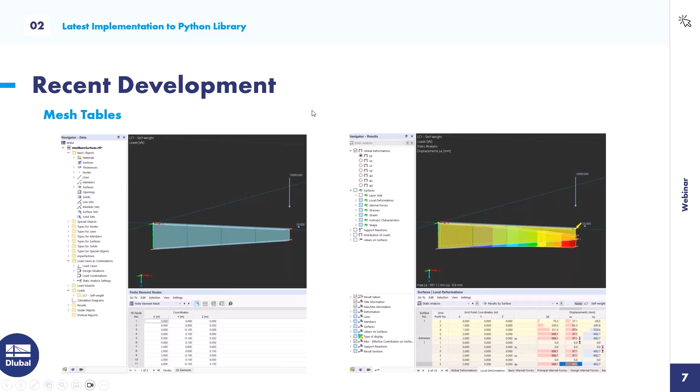And lastly, the most exciting one in my eyes - we have developed our chatbot assistant using large language models. We trained a large language model on data we've been building for years. Now you can ask anything related to Dlubal software, finite element analysis, or any question you can imagine about structural analysis, and Mia is going to help you with that.

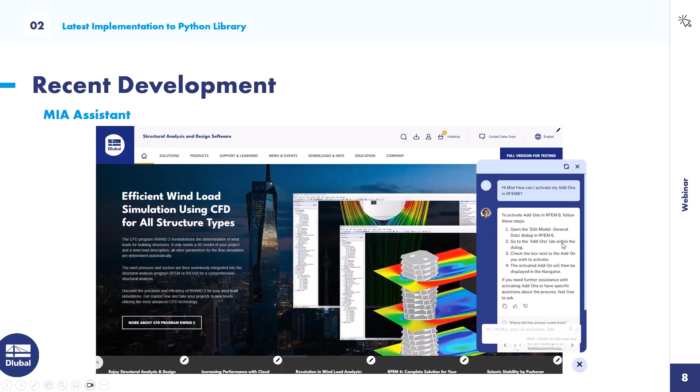Mia is directly integrated into our website. You can access Mia through our website, or it's directly integrated in RFEM itself too. So there are two points where you can access Mia.

Okay, after the latest developments, now I'll show you our library and community-driven developments. As Dlubal Software, as I said, we're committed to keeping our ongoing development open source and collaborating with our users. Our whole API development is public on GitHub, and is accessible to everyone.

On our GitHub page, we are getting in touch with our users, supporting them with their questions, and they're also supporting us with their contributions. I would like to invite everyone in this webinar to our repository on GitHub and be a part of our community.

Also, we have a documentation website for our external developers. On this website, we have articles about how to get started, how to install the library, and all the necessary insights. We also have explanations for every class and method. I kindly ask you to visit it and take a look - you can find the link in our GitHub repo.

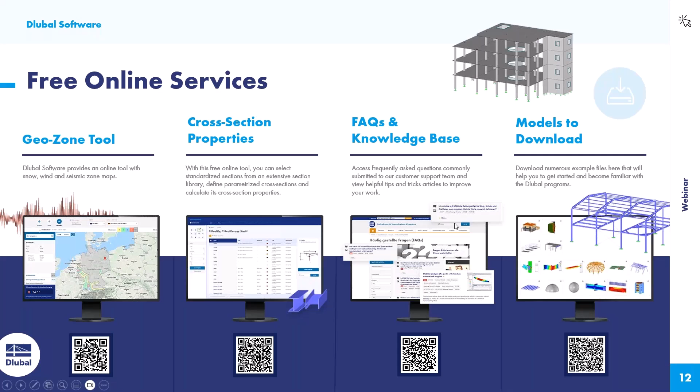So that's it with the presentation. Let's quickly jump into the real-world applications I wanted to show you. In this webinar, I'm going to use Visual Studio Code. I'm going to open my webinar examples.

So as you can see, I downloaded my library here. This is the RFEM library I would like to access, and you can also access it via pip install, but I wanted to use it from a local directory for this webinar. If you want, you can use it via pip too, so it's accessible from everywhere.

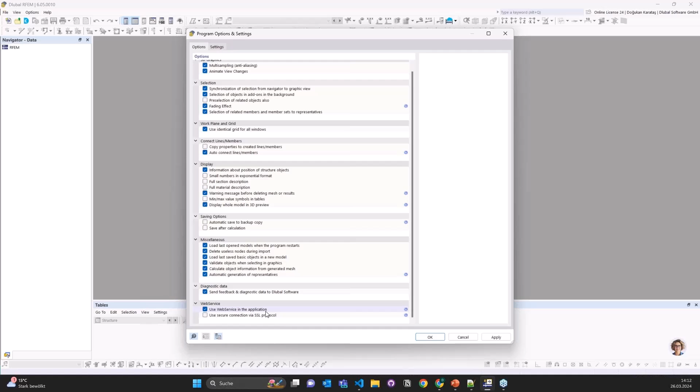First example, I'm going to show you a dynamic analysis of a two-story concrete building. I'm going to create a Python file here. I opened my RFEM already, and in the program options, use web service in application is enabled and server port range is true.

First thing I need to do is import my necessary libraries. I'm not going to write them from scratch, I prepared it beforehand, so I'm just copying and pasting. First I'm importing the enumeration items, all of them. Then I'm importing the model class, calculate all, set add-on statuses, and so on, plus all the basic objects I need: material, section, thickness, outline, etc. Also some static analysis settings, load case and model analysis settings, and some loads, surface load. Then to access the results, I'm using our result tables class.

First thing I would like to do is call my model class, and I'm going to give an argument true, which means create a new model. If you want to access an existing model, you should call it false. Then I'm going to give the name of the model I like, so dynamic analysis. Then I'm going to put just a classical Python checker for whether I'm running directly inside the script or importing something, so it should be main.

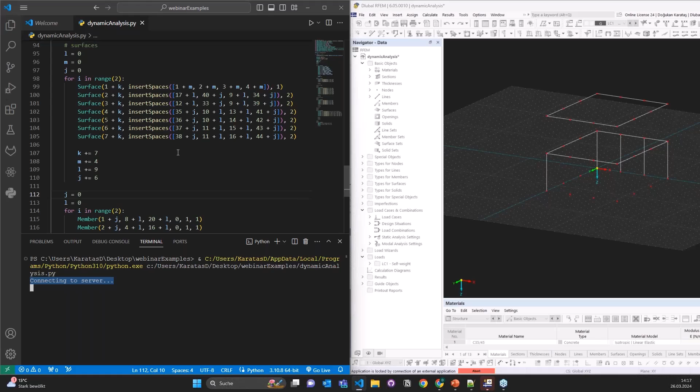As you can see, now my dynamic analysis model has been created. New model is open, and then, yes, application is locked by connection of an external application. This external application is my Python program, apparently. So as you can see, now the lines has been created, materials, and then surfaces and members. Done, so my geometry is right here.

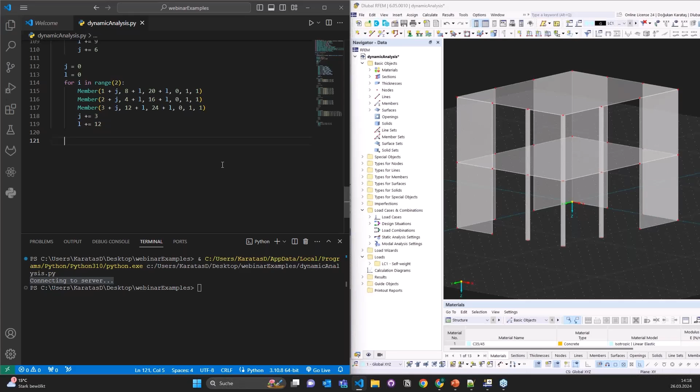Nice, yeah, after the geometry, now I think I can jump into what I need. So first I need the boundary conditions. So I would like to assign some line supports and node supports. So I'm going to call my line support class, and it says to me number of the line support. So it's the first one, and then I can assign the lines.

So let me check which lines I need. So 37, 34, 33, 36. So it's from 33 until the 38, sorry, 35, 36.

Yes, and then I can select my support type. So I'm going to use hinged. As you can see, I already defined - when we are creating this library, we defined some default values. As you can see here, the default value is hinged. So if I just leave it empty, it will know I want to use hinged, so I don't need to create something else for it.

Now I go to nodal support. It's nodal support 1, and which nodes I would like to assign here, 8. What's the member now? 4 and 12 here. So 4, 8, 12. And then it's the same, but just for showing, you can just call nodal support type, and that, as you can see, there's fixed, free, hinged, roller, and so on. So I'm going to select hinged here.

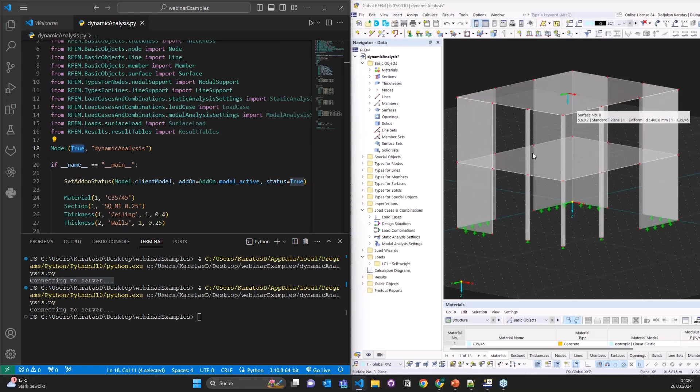Maybe there could be a question from this part, because in the model, where is it? Yes, in the model class. So I told the program through dynamic analysis, create me a new program. But we added a new feature that if you're calling an existing application, no matter what, if you write here true or false, it will automatically know which model to connect. So it's not going to be closed and written again, so you don't have to wait again and again every time you run your program.

Okay, after the nodal supports, I would like to create some analysis settings for static analysis settings. As you can see, there are lots of attributes for static analysis settings, but I'm just going to use the default ones. Also for modal analysis settings, I'm going to use default modal analysis settings.

After that, I would like to create 2 load cases. The first one is that I'm going to assign some dead loads. Also, I'm going to think about the self-weight too. So for this, as you can see, there is an attribute of self-weight, so there's a list. I'm going to open my list and tell true, yes.

Consider the self-weight - not on X direction, 0, not on Y direction, 0, but in Z, so 1, yes. So that means take into consideration the self-weight in the Z direction.

So lastly, I need to assign an action category type, which is permanent, G, for this case, yes. As you can see, for all the enumeration items, we already assigned all the enumeration items to a class, so you don't need to write it from scratch. When you use dot notation, you can see all types of action categories inside the library, and you don't need to write it from scratch. I know it's named something like permanent and G, and I can just write some letters and it's here.

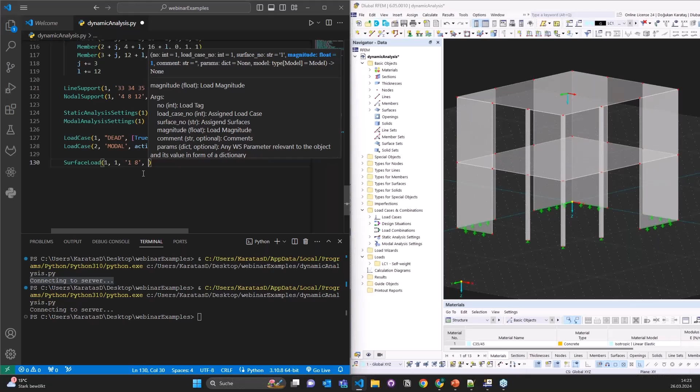Yes, it should work, I hope. After that, since I have load cases, I can create a surface load. So surface load 1, I'm going to inherit it from load case 1, and assign it to the surfaces for ceilings, surface number 1 and 8.

Let's select 5 kilonewton per square meter. Then I'm going to calculate all, but before that, let me check if the loads and analysis settings are assigned correctly to our model.

So I run the script again. No, there is no analysis type. Maybe I made a typo here. Let me check... yeah, there's a typo. Let's try it again.

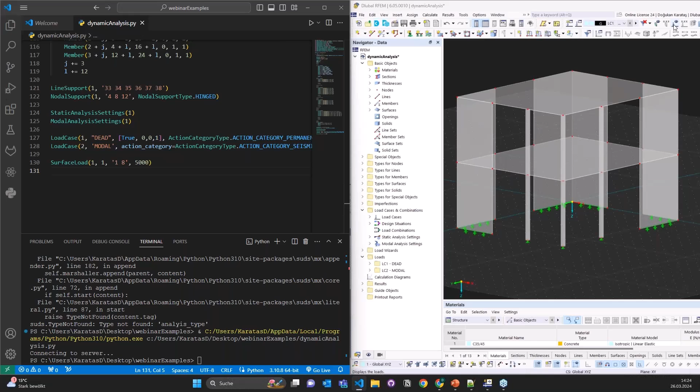Yes, so everything is here. I will turn on my loads - 5 kilonewton per square meters. Everything looks cool, I can start my calculation.

Then I can read my results also. So I'm going to call my calculate all function. It will calculate everything, then that means I can access the natural frequencies.

Let's create a variable called natural freq and call our result tables dot notation. I would like to reach modal analysis, natural frequencies. The object type is a load case, so modal analysis is a load case type. I don't need to change it, but I need to give the loading number because modal analysis is loading number 2, but by default it's 1. So I changed it to 2.

If you want, let's print it to the console. Printing is the best debugging in Python. Let's try it.

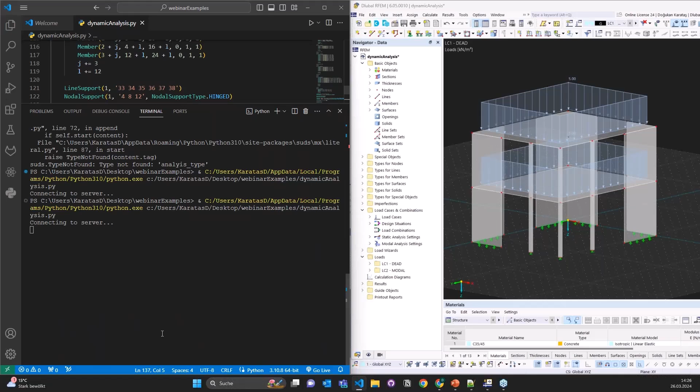Yeah, so connection is started, and then we're expecting the mesh. Yes, mesh is done. Now the calculation has started also.

And yes, I printed my angular frequencies, eigenvalues, natural frequencies, and also the natural period, of course.

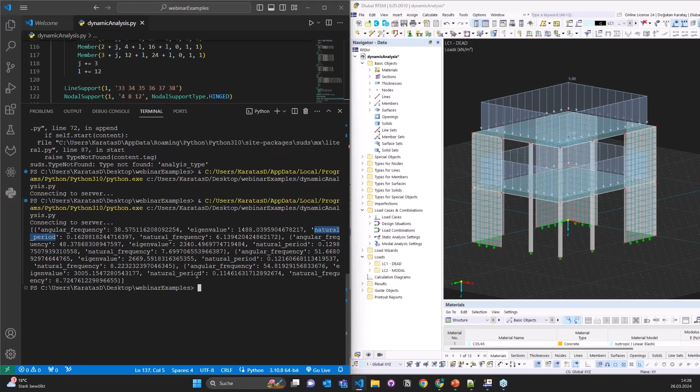As you can see here, now you can go to modal analysis - not static analysis, modal analysis. This table, I can access this table in my Python script. If I run this solver in the background without any GUI, I can still have access and play with this dynamic analysis data, as you can see.

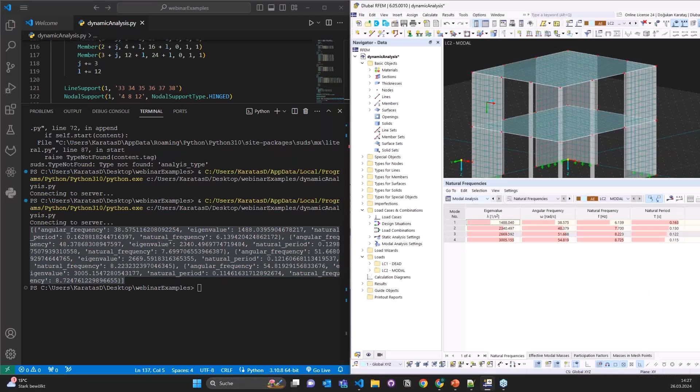That was all for my first example. I will jump quickly into the second one. So what I'm going to do is first close my terminal, maybe close this model 2. Then I am going to create a steel beam constructed by surfaces, and then we will analyze it.

Let me just copy and paste the imports too, I don't want to write them all over again. I imported the model class, calculate all functions, some base settings, and basic objects like nodes, lines, materials, and supports. The different thing is now I imported my mesh settings, so I can change my mesh setting in every calculation, and also from result the mesh tables to access them. Also, I imported the external Python module pandas to handle data, and I'm going to visualize our project using the plotly library.

First things first, call the model class true steel beam surfaces. In this string, if you want, you can give the rf6 or not, so it will automatically understand what's going on, it doesn't really matter. I would like to add a service call, which is delete all - that means every time I run this script, everything will be deleted and created again, so I don't want to have errors because of overwriting.

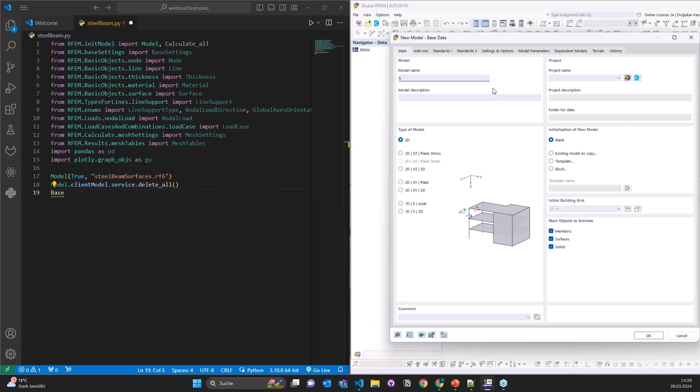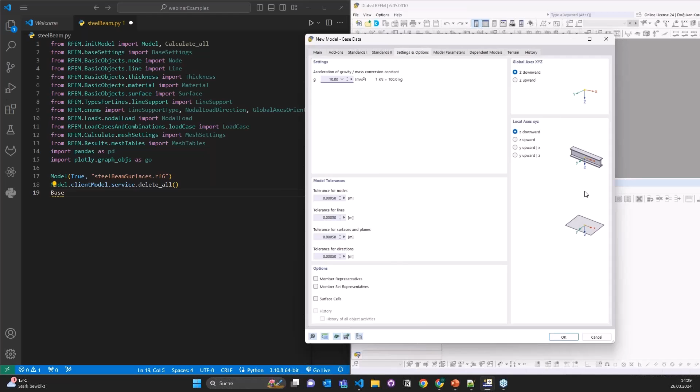Since I'm going to visualize it, I'm going to change a base setting. In RFEM, when you create a new model, there is always a chance in the settings and options for local axis. I'm using my GUI Z downward, but in programming, I prefer the orientation Z up because it's always easier to use, I would say. So I'm going to change this base setting using my base settings class.

Global axis orientation is equal to global axis orientation type Z up, so it will change the global axis orientation. What I need to do is create some nodes and lines. I prefer to get them also, I don't want to write them from scratch here, so boring for you. As you can see, I have 12 nodes and 16 lines to construct a simple varying cross-section tapered beam.

So I'll run and let's check the geometry first. I'll create a new model called steel beam surfaces. As you can see, the global axis Z is upwards and my model is created. So I'll zoom in - yes, this is my tapered beam, which I want to analyze. It's not a beam actually, it's just lines.

So I'm going to assign some thicknesses to them. First, I need a material - I'll select S235 steel material. Then I'm going to create two thicknesses: one for web, and material number 1 I assigned a uniform thickness for web, let's select 0.01. The thickness 2 is for flange, 0.016 for it.

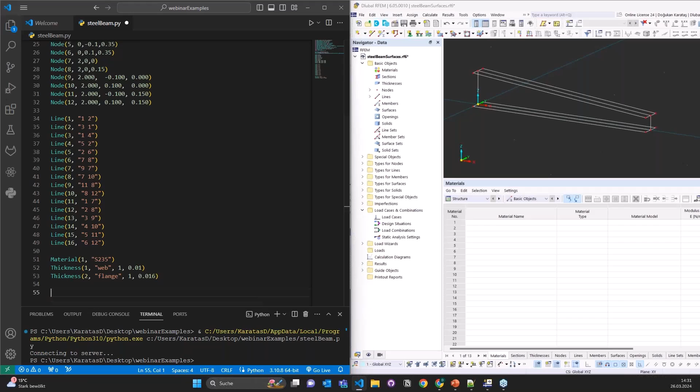After that, I'm going to create surfaces. Surface 1, surface 2 for upper web, surface 3 for upper flange, surface 3 for web, and 2 more for the flange here. So let's create this first surface 1, and boundary lines should be - we can start with this, or here, 13 to 11. Okay, so here is 11, 1, let me check, 11, 12, 6. Okay so it's 12, 6.

Yes, the boundary lines, and the thickness is 1. So the second surface could be something like - checking the line numbers - yeah, 7, 11. So the second one should be 3, 11, 8, and 14, but yeah, there is no commas, just spaces.

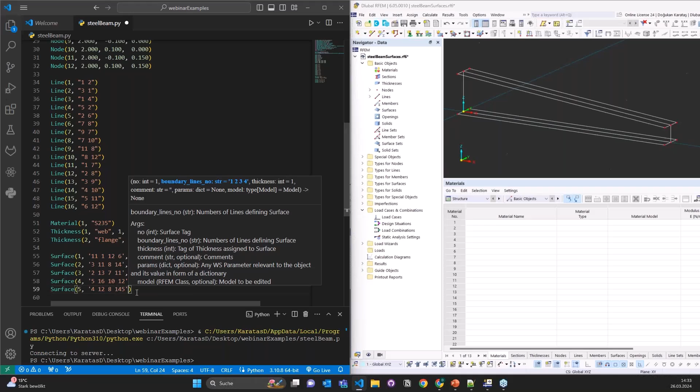And I'm going to use thicknesses 2 and surface number 3. What do I have? 2, 13, 7, 11. Thickness 2. The other surface - okay, here now up is 5. Okay, 5, 16, 10, 12. Thickness 2, and my last surface. I know this process is a little bit boring, so I just want to speed it up a bit. 9, it should be 15. Yes, and thickness number 2. Okay, oops.

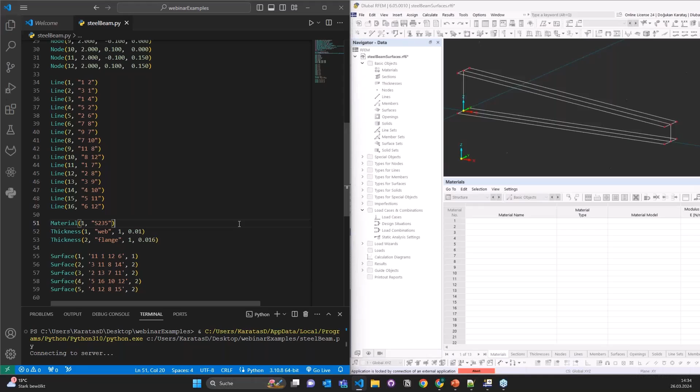And let's run it. Yeah, lines has been created, and let's check the surfaces.

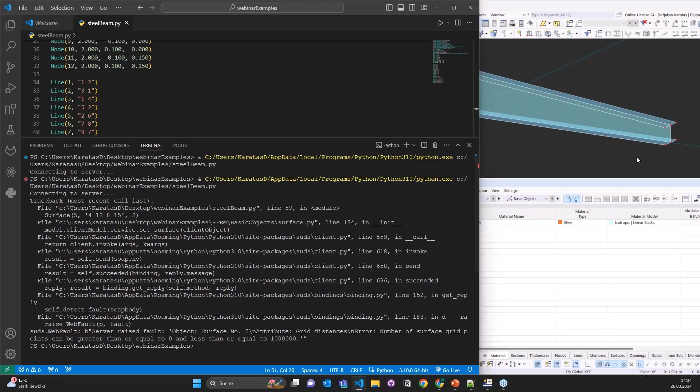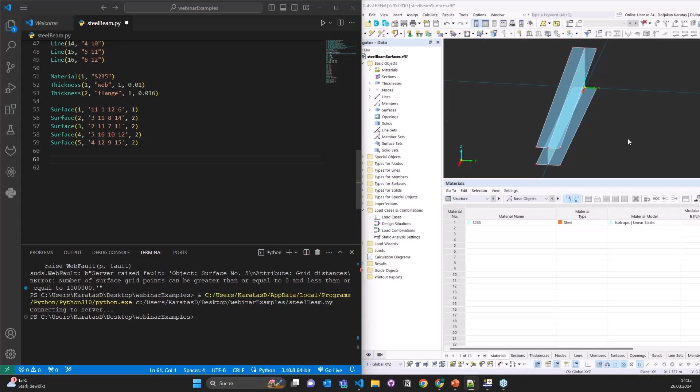Grid points cannot be equal to 0. So where's the problem? Let's check - surface number 5, yeah, it's not created, just the number 5. Let me check why. 12, 4. Okay, it's 9, not 8. Okay, just run it again. I made a mistake there. Let's update it and see. Yes, so yeah, I have my surfaces.

So I created this steel beam with surfaces, and let's add a line support. I'm just going to add the line support to the web, so it's a cantilever beam. Line support class 1 and lines number - which line is it? It's the line number 1. Yes, and line support type fixed.

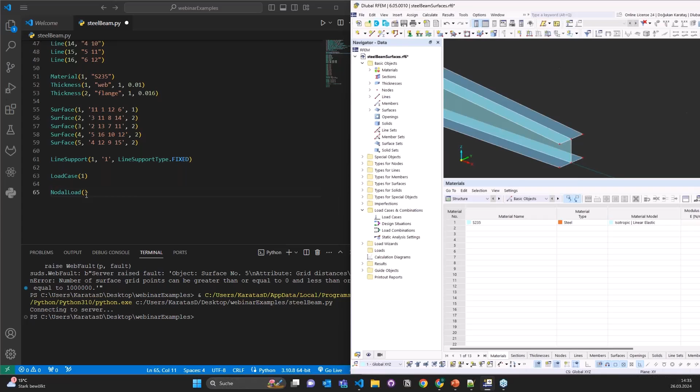Okay, then I'm going to add a load case. I will just use the default one. And I can create 2 nodal loads. My plan is to create 2 nodal loads on this point, one in Z direction, one in Y direction. The first nodal load is going to be load case number 1 and will be on node 8. Then the nodal load direction is going to be global Z. Let's give minus - I don't know, I'm going to give a big number to see the meshes and the deformations good.

So let's go to the other nodal load. It's nodal load 2 actually, on load case 1, on node 8, and nodal load direction is global Y. Let's give 2000, yeah, or 20,000. I have my nodal loads.

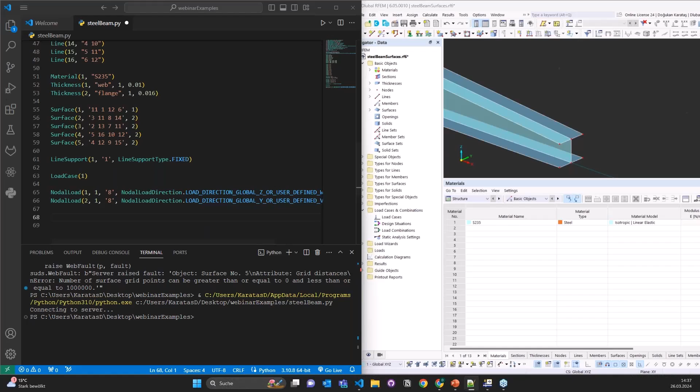So yeah, next thing I would like to do is to play with meshes a little bit. There's a default value for the mesh settings - target length of finite elements is 0.5 meters. I would like to play with it a little bit. So let's create a variable called mesh length, and it's 0.5 by default. And then I can call my mesh settings. Common config is the configuration dictionary for it.

I'll give my general target length - length of FE is equal to mesh length. So let's give it a try and calculate all to see the meshes.

So generating mesh has started. As you can see, it's not a really fine mesh because it's 0.5 meters and it just meshed it into 4 sections. But let's first finish our setup, then we can play with the mesh length a little bit and see the differences.

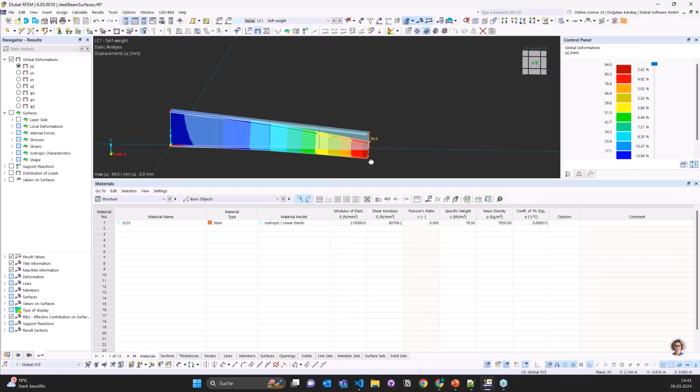And what I want to do next is to access the deformed mesh nodes. So this one is here, as you can see. But when you turn on the result, there are also some deformed mesh nodes, as you can see. So it's basically, let me split it again. Basically, what I wanted to do is access the deformed mesh nodes too.

So deformed mesh nodes is equals to, sorry, let's first take the all FE nodes deformed. So let's call it like this and access the mesh tables and get all FE nodes deformed. This is the table I would like to access. Then I can create a deformed mesh nodes inside a pandas data frame, all FE nodes deformed.

And I'm going to structure it again like this and change it with deformed mesh nodes. Now I think I have it all. Let's give it a try and print all FE nodes or mesh nodes. And then let's say print here are the mesh nodes, and print here are the deformed mesh nodes.

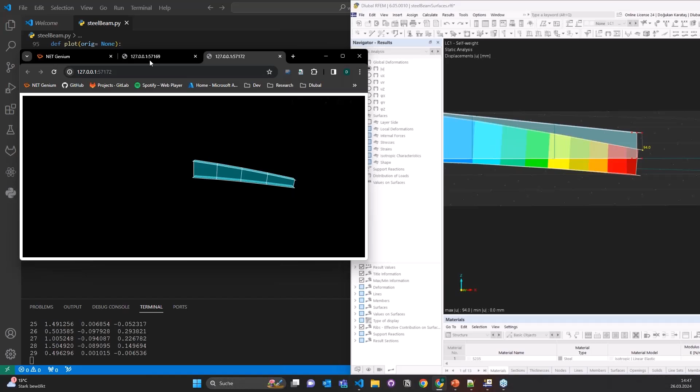Now we will see the data frames printed in the terminal again, and then hopefully 2 web renders. Yes, as you can see, now I created this web render with Plotly, and this is for undeformed mesh, and this is for deformed mesh. You can go through the nodes and check how much deformation for every node is.

As I said in the beginning, this mesh is not really refined, so you can go through your script and tell, okay, 0.5 is too big, so I want to do it 0.1, and let's close them.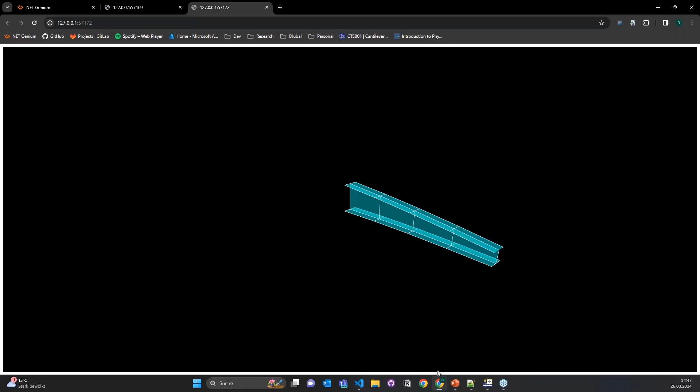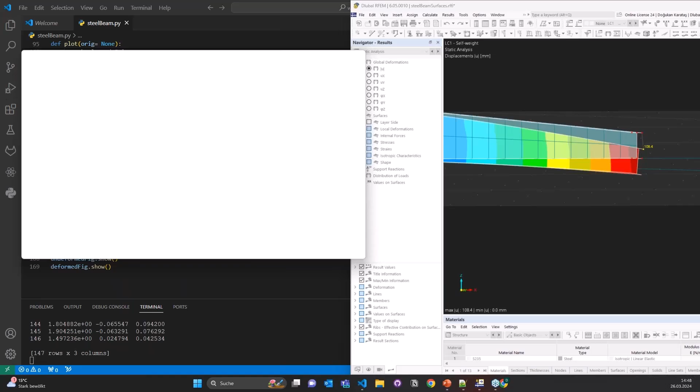And I run my server again. Since I added this service delete all function, it's going to be created from scratch every time. This is something I'm doing on purpose to not get any overrides.

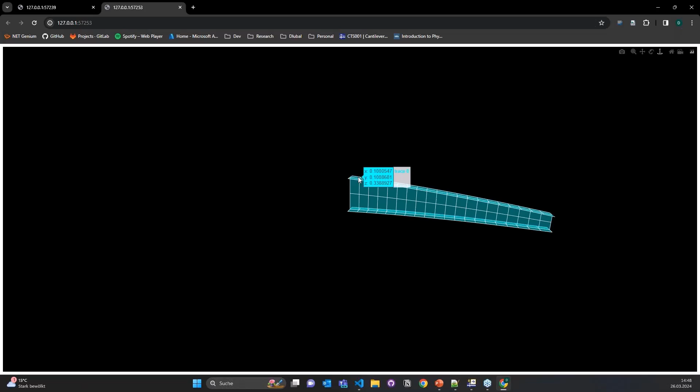Yes, now I have a little bit more refined meshes. Here is the coordinates of the undeformed shape, and here is the coordinate of the deformed shape. So the idea is you can use the RFEM in the background, and you can create some web applications with surfaces, with deformation and all.

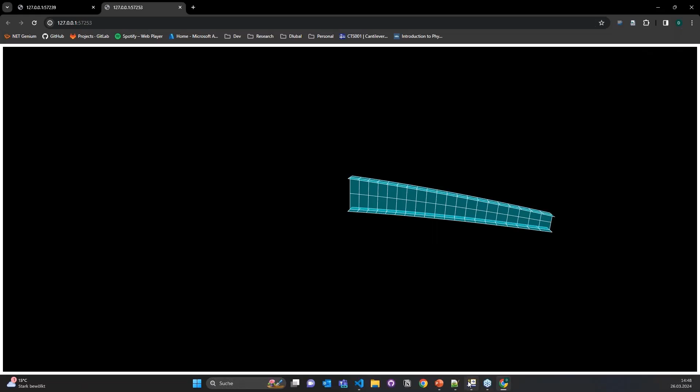And there are some tools in Python. You can find them open source. You can add a scale like we have in RFEM. Yeah, you can add a scale. Where is a scale?

Yes, here. So in the control panel, you can see the global deformations, and it's also possible to add in Python too. So it's a bit complex, so I didn't want to show it today. But the main idea is that with our Python API, there are endless possibilities you can do. You can create your own applications however you want.

Yes, that's all from my side. That was the end of the second example. I hope everything went smooth for everyone who attended, and thanks for joining.